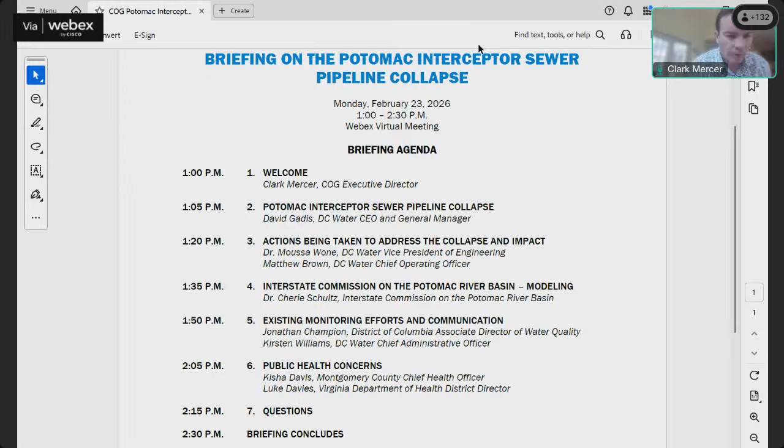The last few weeks we've heard quite a bit about the Potomac Interceptor and what is happening at the site of that break, but also its effects on the region writ large. The turnout on this call is a good example of the impact and connectivity of this region. I see several of our board members on the call: County Executive Brayboy, Mayor Gaskins, Supervisor Bailey. I know Chair Collins from Charles County is also scheduled to be on the call, so a wide range of folks from throughout the region.

The purpose of this call today, we're not going to answer probably every question that folks have, although please hold your questions, there is time at the end to answer them. This is going to get us caught up on what has happened to date, what efforts are afoot to address and fix the situation, and the impacts to this spill in the Potomac watershed itself. We've got our health directors on the call to talk later about some public health elements of this, and we're going to leave time at the end for questions.

I would start by handing things off to Mr. Gadis and DC Water. And just as a preface to this, this region has been through quite a bit in the last year or two, and I know Mr. Gadis and his team have been extremely hard at work over the last several weeks, staying on top of this issue and articulating a solution and a path forward.

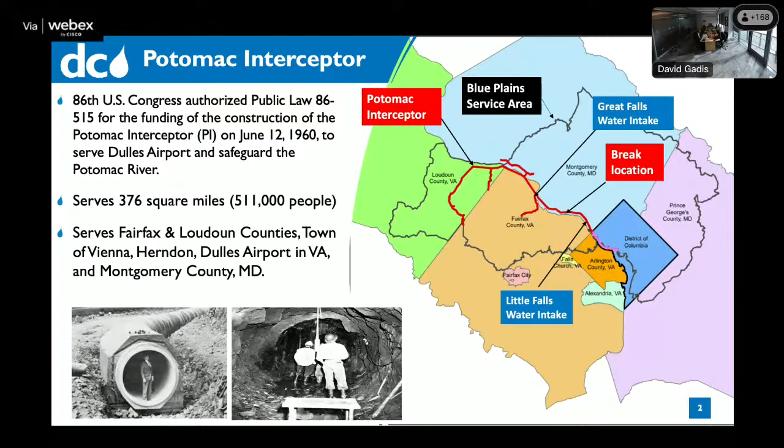The Potomac Interceptor runs as far out as Dulles Airport, conveys flow down 54 miles into Blue Plains, serves over 500,000 people, including Fairfax and Loudoun counties, Vienna, Herndon, Dulles Airport, and Montgomery County, Maryland.

This map shows the break location, and I have subsequent slides that show this with more specificity.

There are two water intakes for the Washington Aqueduct. One is north, or upstream, of the break location - that's Great Falls, and that's the intake being used when the break occurred. There is a smaller intake at Little Falls that is downstream of the break location.

The entire asset is about 54 miles long. It ranges in diameter from 30 to 96 inches. The site where the break occurred was a diameter of 72 inches.

It conveys on average 60 million gallons of sewage a day. Low flow is about 40. It can get up to 100 during wet weather events. We got a lot of calls yesterday and this morning about the wet weather we experienced yesterday and overnight. There were no additional overflows overnight.

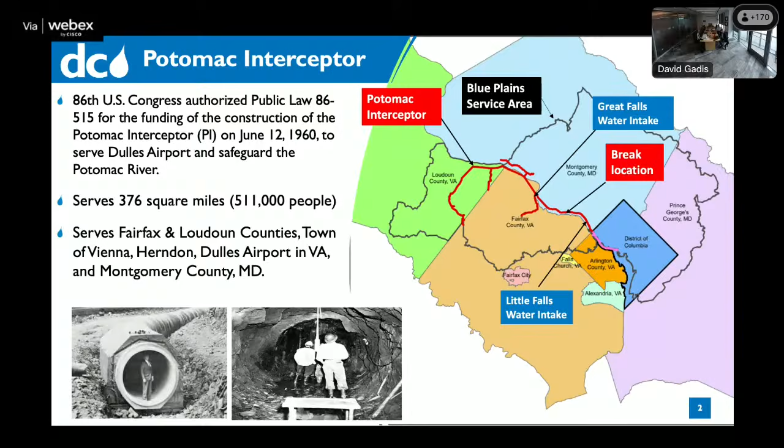As Mr. Gadis said, it appears that some of the fill used was actually debris from the blasting, so we believe that's where some of the large rocks came from that impeded our progress as we reached the break. When that happened, we knew we needed to block off 100% of the flow into the asset so that people could go down there, manually remove the debris, and pull up rocks to clear the blockage.

So that's where we are, in stage 3, repair and flow restoration. We began that at the beginning of February. We anticipate we will have this work done by mid-March. It encompasses reaching the blockage, removing the blockage, and reinforcing sections of pipe upstream and downstream of the break so that we can return flow. After flow is returned to the asset, that emergency repair will be done.

We have already begun working on environmental restoration efforts, started a couple of weeks ago. We knew there would be efforts to restore 3 main areas: the C&O Canal, where the flow is being diverted now, the drainage channel that carried flow from the break site to the Potomac River and runs under the C&O Canal, and the Potomac River shoreline to Swainson Island.

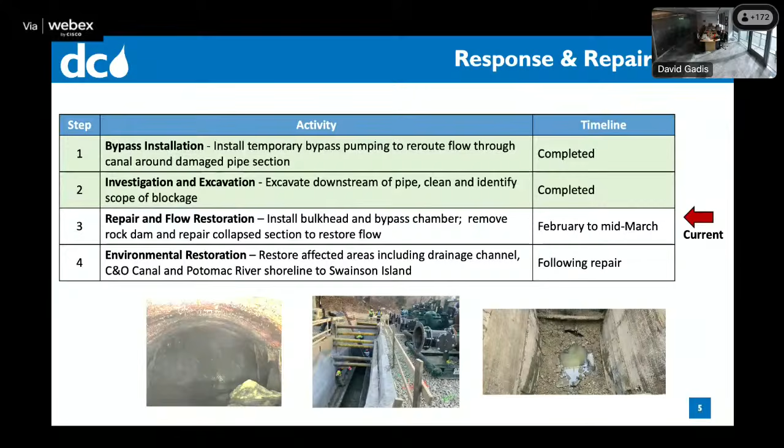Under the light of day, we began putting a plan in place, working with the Park Service. It was a big effort to bring in the pumps and get the bypass pumping established, and to remove the gates from the historic locks along the C&O Canal. There was a lot of coordination with the National Park Service, who have been really great to work with. They were out with us the night of the 24th when we were able to start turning on the pumps and walked the entire distance with us as the flow entered the C&O Canal.

We also had to do a bunch of brush clearage - there were plants in the C&O Canal that were removed by our contractors. On the night of the 24th, we had 40 MGD of pumping capacity, 6 pumps at 2 different manhole locations. We did experience some difficulties in the cold. One of the biggest issues was that pumps were getting clogged up with rags and grease, and as the pumps were taken out of service to clean them, because of the cold weather, they froze up. So we started building tents with tarps around the pumps and bringing in heaters. That meant that when the pumps clogged up with rags, we were able to take them out of service without them freezing up. We also brought in additional pumps, bringing the pumping capacity to 60 million gallons a day by January 27th.

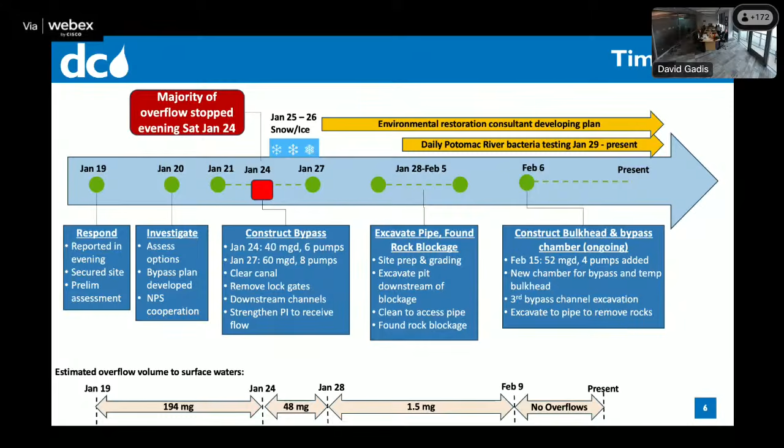One location is north at Old Anglers Inn, north of the spill site. The second, number 2, is at the spill site, and then locations in the district: Fletcher's Boathouse, Georgetown. We added the Anacostia River at the request of the riverkeeper because of the tidal nature of the Anacostia. There's also a site in Prince George's County at National Harbor.

We anticipate that those areas will remain elevated until we can do the environmental remediation work. It's important to note that E. coli levels vary pretty substantially in the Potomac River. We have testing data from 2016 as part of our post-construction monitoring of our Clean Rivers program. It seems to range from 10 to 5,000, just depending on the day, rainfall, and other events in the Potomac River.

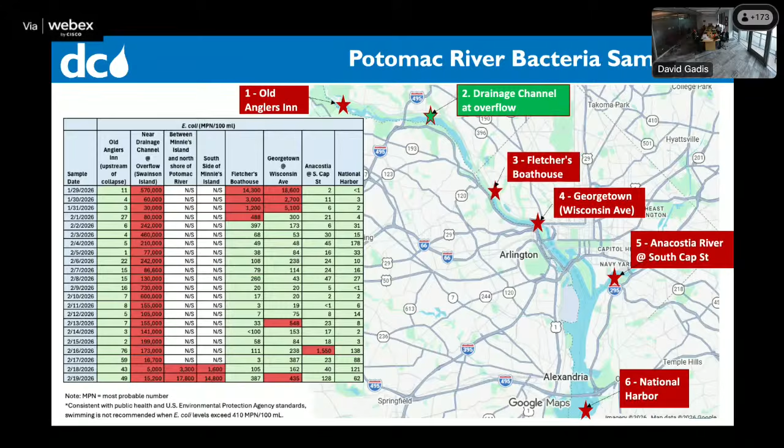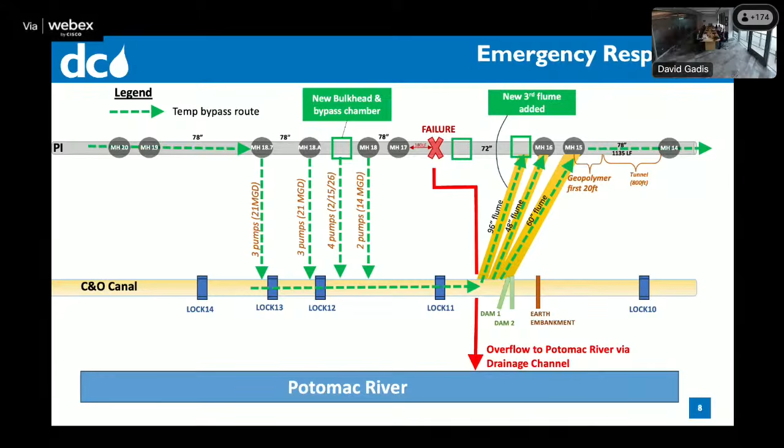This is what we flexed to when we constructed the new bulkhead and bypass chamber, adding the additional pumps to cut off flow to the Potomac Interceptor and get 100% of it into the C&O Canal. By adding that 96-inch additional flume, we were able to handle the additional capacity of flow into the C&O Canal. When we put that flume online, levels in the canal dropped almost a foot, so the canal is able to move all of that flow.

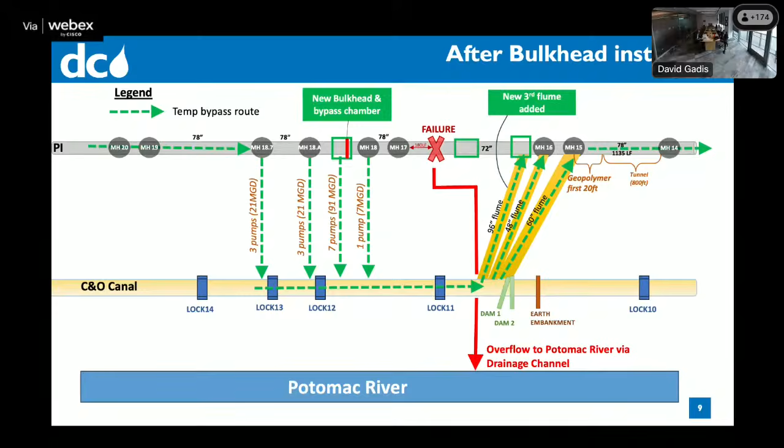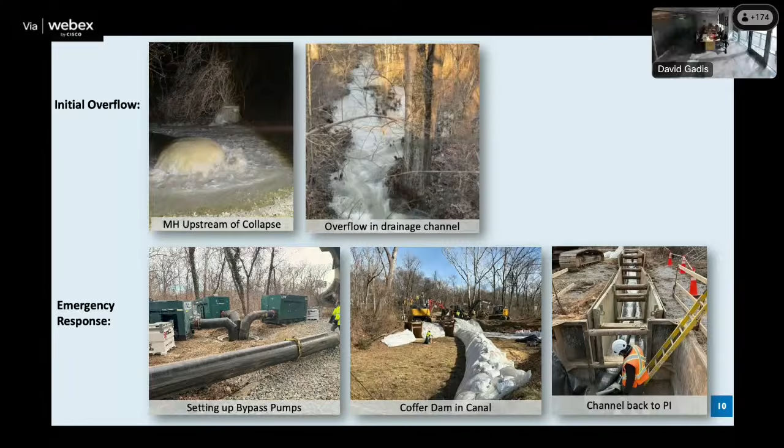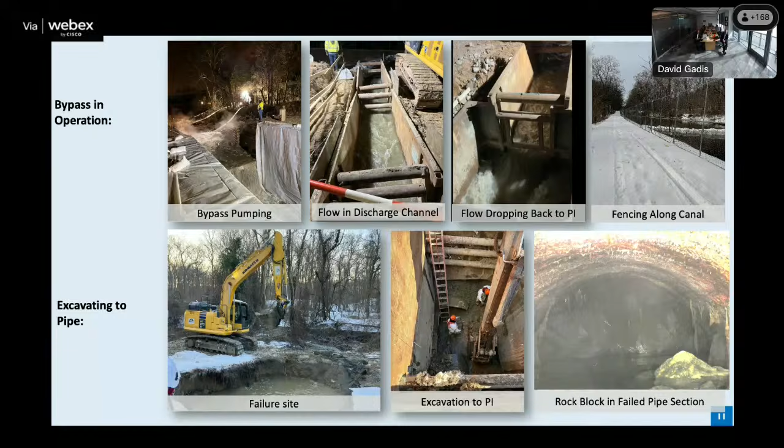We also put up signage — I think we have a picture of that in another slide. After we got the bypass into operation, we began excavating the failure site, and that's when we encountered the rock block, shown in the picture on the right.

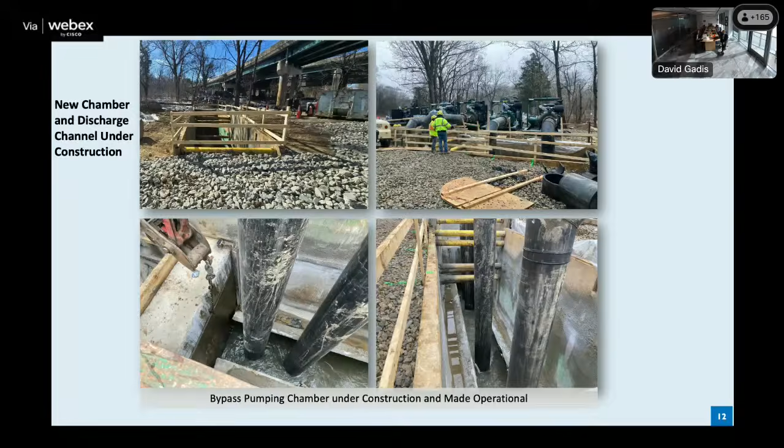Those releases, I'm sure you've seen them, are posted on our website and sent to elected officials. That's been a primary way of providing an update every day. We also include the water quality testing results when we have them in that update every day.

There's been a lot of coordination — NPS, Coast Guard, FEMA, Corps of Engineers has been on site recently, Maryland Department of Environment, District Department of Energy and Environment. A lot of folks have shown interest, and we've been able to provide tours and show the efforts the men and women have accomplished to get this done.

Matt, before you go ahead and jump to the next slide — yeah, no worries. Just a note for all the members on here, Mr. Mercer will work through Lisa Reagan, who's been helpful in coordinating the communications team.

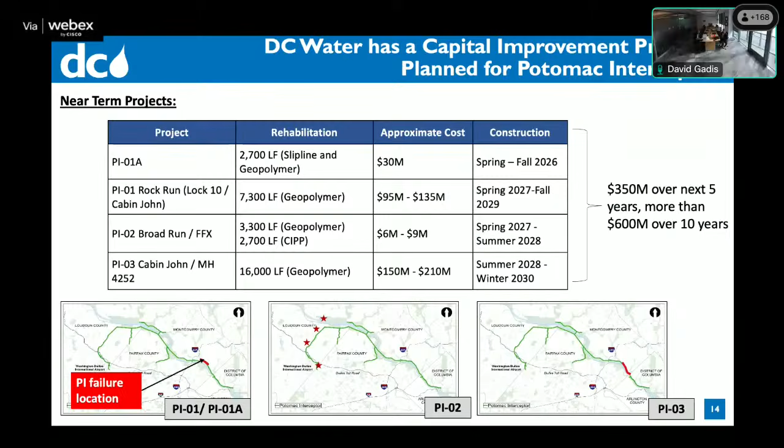Prior to this failure, there was 800 linear feet of slip lining done upstream of the failure location. That was a project completed in the December timeframe.

I mentioned earlier about the environmental restoration. We are currently sharing a draft of the plan with National Park Service and MDE. They're doing walkthroughs — we want to make sure we understand the requirements, and there have been at least three site visits with those two organizations to ensure we can restore those three areas to the conditions that existed prior to the break.

We've done that through an environmental consultant brought on board a couple weeks ago. We walked the site and made recommendations about the environmental restoration plan. Those three areas are the C&O Canal, currently being used as a bypass; the drainage channel, which carried the flow into the Potomac River from the break site; and the area where the wastewater entered the Potomac River between the shore and Swainson Island.

We want to do this as quickly as we can and are working with those organizations to understand requirements so we can get it done as quickly as possible. It's going to be done in phases — the canal will require additional remediation, likely bringing in soil, planting, and similar work. What's been identified so far is a couple of phases for each location, and we're working with MDE and NPS to get that work done as quickly as we can.

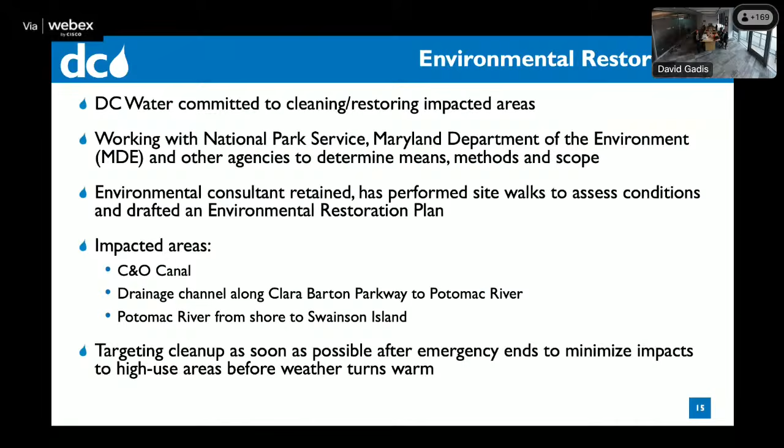And so that takes us to where we are. The very first thing is to repair and restore flow back to the Potomac Interceptor as quickly as we can. That is the way we will not have any more overflows. We've been very successful and haven't had an overflow that's impacted the surface water since the 8th. The way to provide 100% assurance that we won't have overflows is to get the flow back in the PI, so we're really focused on that mission right now.

We've already made some progress on the environmental restoration in that we have a draft plan and we've had conversations with NPS and MDE about it. As soon as we can, we want to be able to start that work. The site is heavily used by recreators. We'll continue our rehabilitation work on the greater Potomac Interceptor. It's an important asset, and we'll continue to invest in it.

That concludes the presentation I have.

Matt, am I back? I don't know if you can hear me. Yeah, sorry, let me see if I can go back. No worries, I apologize, I'm not sure what the technical glitches were, but I did just want to acknowledge Mr. Mercer and Lisa Reagan for their efforts to coordinate us on a communications front, and certainly Monica.

One of the two most important takeaways is that we have two public meetings, community briefings we're doing in partnership. The first is Wednesday at 7 p.m. at the DC Water headquarters. The second is Thursday, February 26th at Walt Whitman High School in Bethesda, Maryland. Both will have live streaming opportunities and engagement, and tabling efforts from our regional partners on an environmental perspective and public health perspective.

So we just wanted to make sure you all have that information and can share it effectively through your distribution list, because we want to ensure interested residents, advocacy groups, and our environmental partners have an opportunity to engage and hear this type of feedback with us. Thank you, and apologies for the technical glitch, not sure what happened earlier.

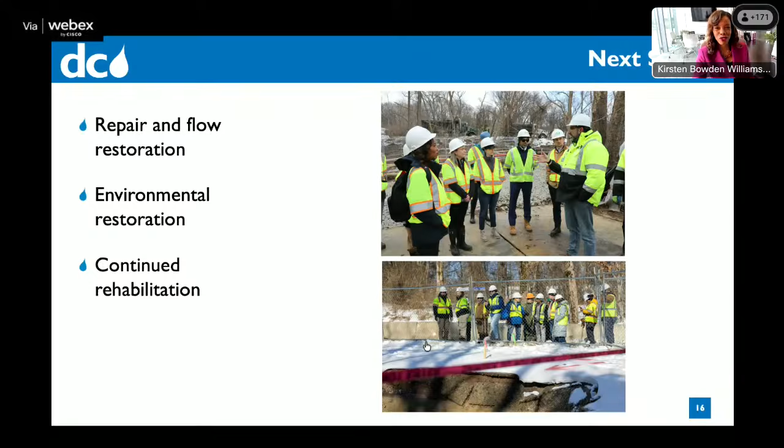Please use the chat, folks, as we have the next couple of presentations, for running questions, and we'll have DC Water back on in just a few moments. I know folks will have questions at the end, but if you think of them during the presentation, put them in the chat so we can get those answered. We'll hear next from Dr. Schultz with the Interstate Commission on the Potomac River Basin, ICPRB. They have done some great work on modeling the effects of this break and what that means downriver. So, Dr. Schultz, you're up.

Thanks very much. I'm Cherie Schultz with ICPRB's section for cooperative water supply operations on the Potomac, and we were asked to talk about some of the spill modeling we've done in relation to this event. Next slide, please.

We've done two preliminary modeling efforts, both related to public health concerns and pathogen levels in the vicinity of the break. The first was requested by Maryland Department of Environment and EPA Region 3; we modeled pathogen levels between the break and Chain Bridge. The second was done just recently at the request of the district, modeling travel speeds of pathogens in the vicinity of the district.

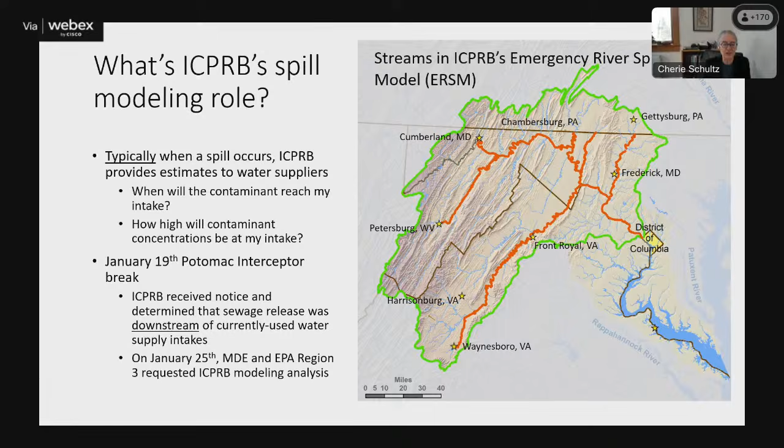On January 19th, we received notice of the sewage release late that evening and quickly ascertained it was downstream of any water supply intake being used at the time, so we didn't model it. It wasn't really threatening an intake. But on January 25th, MDE and Region 3 requested some modeling analysis from us.

So the first thing we did on the 25th was model pathogen levels in the vicinity of the break. We used the emergency river spill model to look at bacteria concentrations downstream of the break, in a very short stretch of the river. This model's extent goes just down to Chain Bridge, so we were looking at concentrations over a 5-day period from the 19th to the 24th, just down to Chain Bridge.

We modeled fecal coliform bacteria, which is an indicator of pathogen presence. There are many other species of bacteria that may be of concern, but if you understand fecal coliform concentrations, you can make estimates of other concentrations.

Our modeling, and all modeling, uses many estimates and simplifying assumptions. The model results are just estimates and should really be taken as an indication, a heads up, of when and where monitoring should occur.

We assumed that the sewage release began on January 19th at 4 p.m. and lasted 5 days, 120 hours, which is what we knew on the 25th. The release rate we were asked to model was 40 to 60 million gallons per day of raw sewage entering the river.

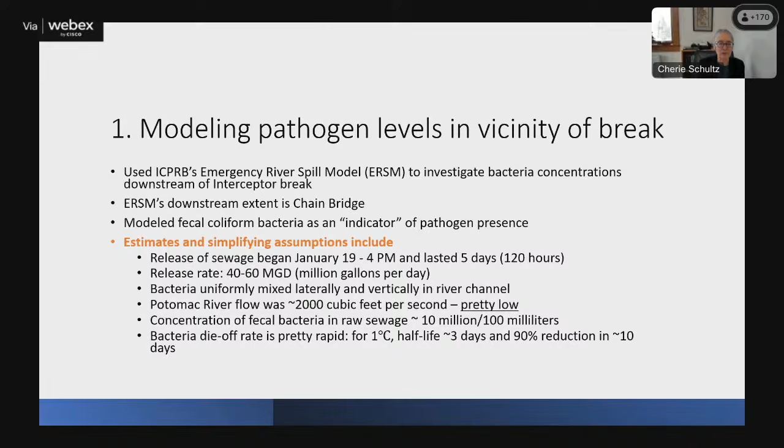So I won't show you the modeling results, but here are the key takeaways from this first modeling activity with our ERSM model. I want to stress again, the release was downstream of all water supply intakes except Washington Aqueduct's Little Falls intake, which is a backup, and we knew it wasn't being used at the time.

Our model was showing fecal coliform levels between 200,000 and 400,000 counts per 100 milliliters, and E. coli levels between 70,000 and 125,000 counts per 100 milliliters - more or less in the ballpark of what some of the monitoring is showing. Again, this was just in the area downstream of the breach down to Chain Bridge, assuming just a 5-day release that then shut off.

When the sewage did stop flowing into the river, according to the model, predicted bacteria concentrations fell quite quickly to near background levels due to die-off and also due to flushing and dilution by river flow. Our model predicted that at Little Falls, the Washington Aqueduct intake, bacteria levels after the release stopped would fall to near background in about a half day to 1 day. At Chain Bridge, the model estimates bacteria would fall to near background levels in about 1 day. So that was fairly optimistic.

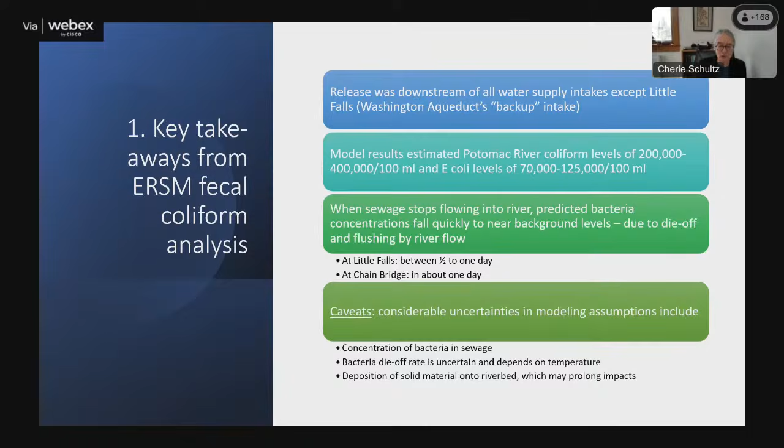The second modeling exercise was done more recently for the district. Again, they're interested in the public health aspects of this release.

They wanted us to model the travel speed of the bacteria in the vicinity of Washington, D.C. So we used another model that extends farther down, all the way down into the Potomac estuary. It's called ICWATER model, developed by EPA and others, and it's currently maintained by a contractor for the U.S. Army.

This model allowed us to estimate net mean velocities of water in the Potomac estuary, telling us how fast bacteria would be carried down the estuary to the edge of the DC border. Our objective here, again preliminary, was just to estimate mean travel speeds of a contaminant release, using estimates and simplifying assumptions. The release location we assumed was near I-495 and the Clara Barton Parkway.

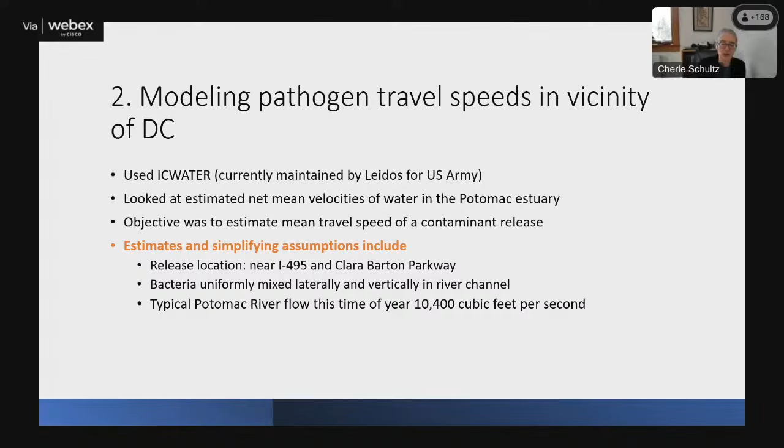We assumed bacteria is uniformly mixed laterally and vertically in the river. We used a different flow because by this time there had been some precipitation events, so we chose a typical Potomac River flow for this time of year of about 10,000 cubic feet per second.

Takeaway from the second modeling exercise: according to our modeling and assumptions, in the event of a short-term release—we didn't specify what was released or how much—pathogen levels would flow past the DC southern border in less than one day. Pretty rapid.

Caveats again: our model doesn't consider processes which could prolong impacts, including transport and oscillation by tidal currents, and deposition of solid material onto the riverbed.

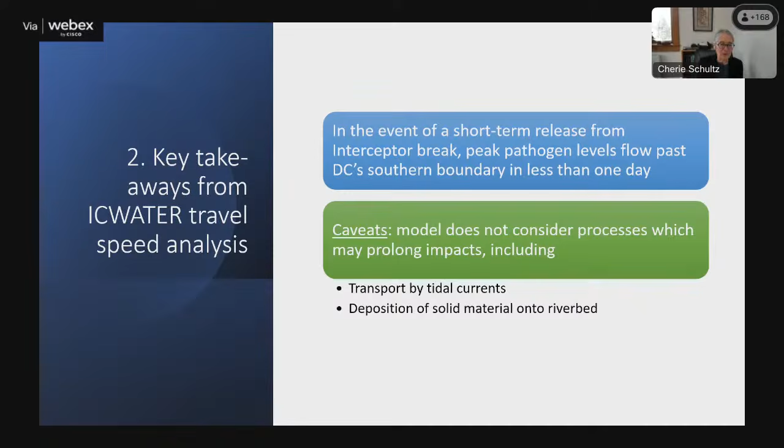Finally, I want to say a little bit about the Potomac estuary downstream of DC, all the way down to Colonial Beach and Smith's Point—places you may visit sometime, but probably aren't thinking about right now. Here we don't have any modeling capabilities to investigate or explore what might happen. It's possible that the Chesapeake Bay Program's estuarine model would be useful here.

The potential impacts I've heard about from our aquatic ecologists and water quality specialists at ICPRB may play out in future months, maybe this summer, maybe for a number of years. First, nutrients—nitrogen and phosphorus from the sewage—may increase growth of algae downstream and may increase the likelihood this summer of harmful algal blooms.

Secondly, the deposition of sewage sludge, solid sewage material on the riverbed, may increase biological oxygen demand this summer in the river sediments, and the likelihood of fish kills. These are things that will definitely need investigation by environmental scientists.

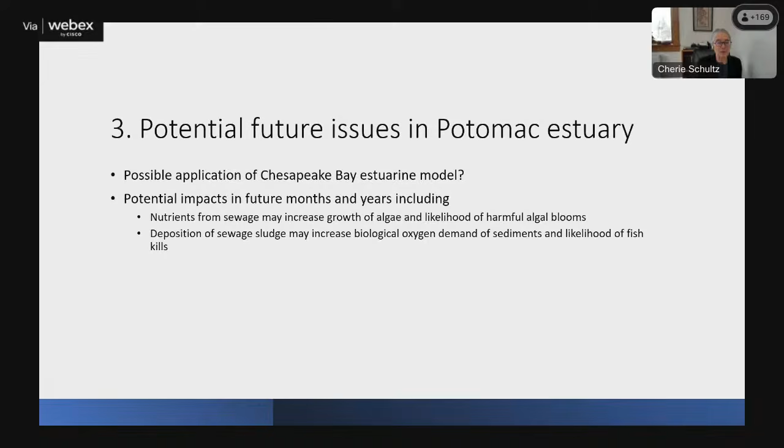Final takeaways. In terms of water supply, which is the purview of my group, we want timely completion of repairs, and we hear that's definitely happening—we're very grateful about that. These are important because Washington Aqueduct's Little Falls intake is just a backup, but an important one, especially in case we're hit by severe drought this summer, because then they need to switch to the Little Falls intake if flows fall below certain levels.

Secondly, certain sections of the Potomac Interceptor are above essential water supply intakes and should be prioritized, we feel, for future repairs. We can see in the material Matt Brown showed us that repairs are definitely going to take place upstream. This was requested in a letter by our executive director, Mike Nardolilli, to EPA Region 3 on the 29th of January.

As far as public health concerns, when sewage stops entering the river, we expect bacteria concentrations to fall to near background levels quickly due to die-off of bacteria and flushing by river flow. Modeling and monitoring have complementary roles.

So really now we think monitoring is most important, and it looks like DC Water and the district are doing that monitoring. Finally, risk from residual solid materials remaining on the riverbed is uncertain—this could make some hazardous effects linger, and there's uncertainty there.

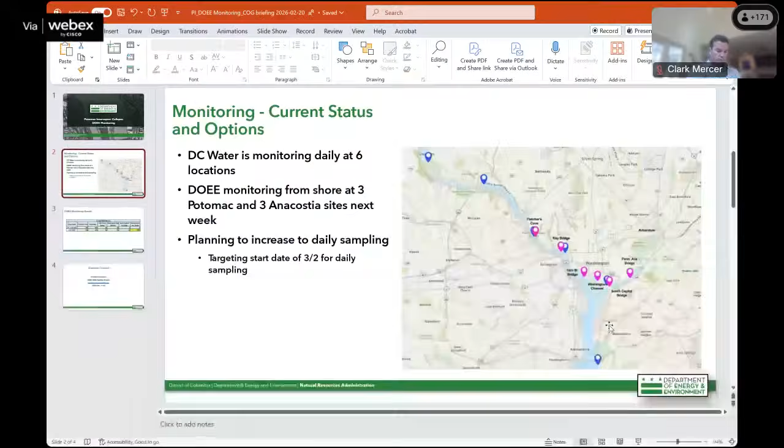Thank you very much. Good afternoon, everybody, can you hear me okay? Okay, great. If you'll permit me, I'll leave my video off to minimize bandwidth issues, but I do have a couple of slides to share. I wanted to provide a quick overview and summary of where things stand in terms of the district's monitoring posture at the moment. Is that coming through okay? Yes, we can. Okay, great, thank you.

This is picking up on some of the information DC Water shared in their presentation. They have been monitoring daily since the end of January at 6 sites throughout the Potomac River. DOEE is also conducting our own monitoring effort, covering, in some cases, stations that are co-located or very near DC Water's stations, and in other cases filling in spatial gaps where DC Water isn't sampling. We are currently conducting weekly sampling from 3 sites in the Potomac, 1 site in Washington Channel, and 2 sites on the Anacostia.

For context, DOEE's typical monitoring posture at this time of year would be monthly sampling, which we step up to weekly bacteria sampling between May and September. The first sampling event post-collapse was collected on February 9th and 10th, and our team was out in the field last week as well—I believe we captured a sample on February 17th. We're currently working on a plan to increase sampling frequency to daily, to match the frequency DC Water is sampling at. That will require a fair amount of resources beyond what our water quality program typically operates with, so we're in the midst of getting that organized and planned now. Our target date to start daily sampling is March 2nd, or at least sometime during the week of March 2nd.

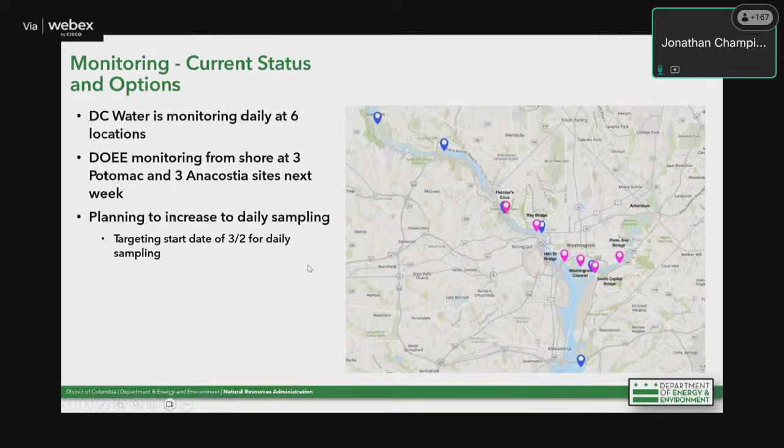We did have one elevated result further upstream in the Anacostia by Pennsylvania Avenue Bridge—I think Mr. Brown alluded to this in his presentation as well. We're confident that result is more associated with stormwater runoff due to a rain event in the day and a half leading up to the sampling. It's also consistent with other testing done further upstream in the Anacostia and some tributaries by Anacostia Riverkeeper. So we don't believe there's any indication that elevated concentration has anything to do with the discharge from the interceptor collapse.

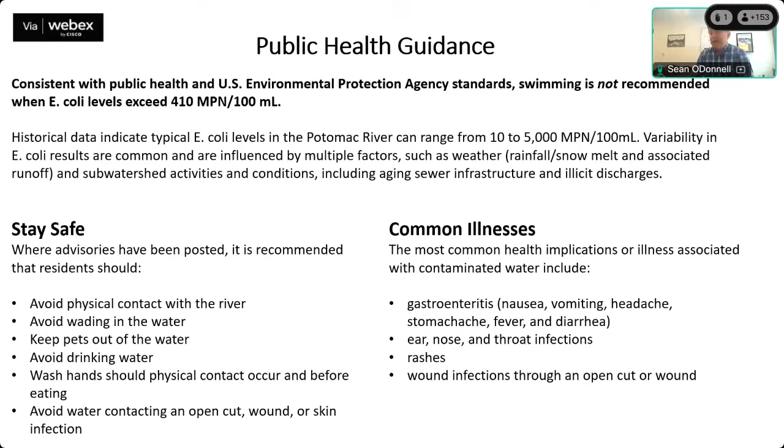I went through a number of what the advisories include, not just for our residents and visitors, but also if you have pets, try to please keep the pets away from the water. They don't read the signs that are posted there, and if they go in the water, they could become sick. If you do have accidental contact with the water, please use routine hygiene standards to clean out any contamination. And then some of the common illnesses you'd see from being exposed to this bacteria: gastroenteritis, ear, nose, or throat infections, rashes, or even wound infections if you had an open cut.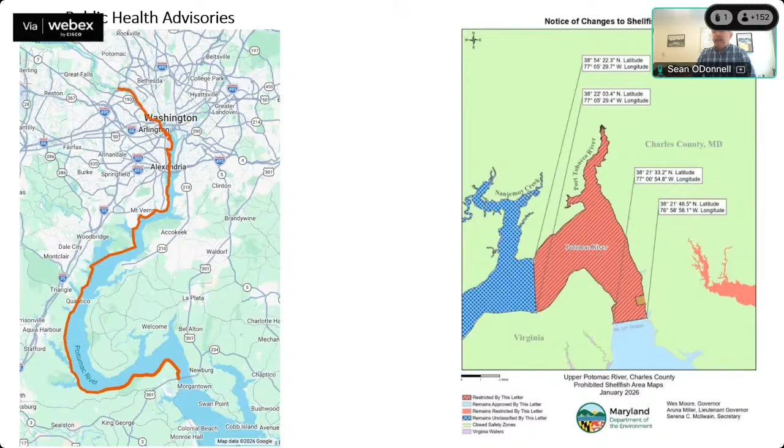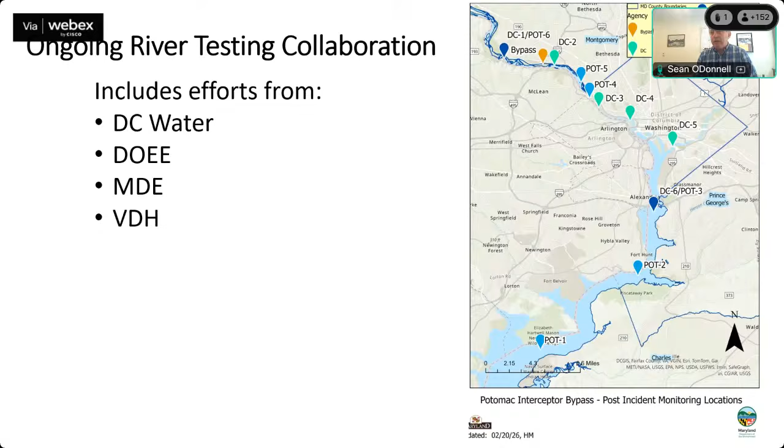I know we've seen what DOEE, what DC Water, where they're collecting. Maryland Department of the Environment is updating a map as well, showing some of the locations where they have been collecting specimens. Those results will start to get published to their website as well. And we've had discussions with them about testing in other specific locations as time goes on, just to verify results from our partners, and they said they're happy to support us in that.

And then we can actually go to the open questions, but in general, we're again recommending to avoid unnecessary contact with the Potomac River. In particular, as we've said about other diseases, vulnerable populations, including immunocompromised individuals or those with very young children, those are the folks who are at increased risk for serious illness. We want pet owners to be aware and keep their pets on a leash and away from the contaminated water.

When we say boaters, it kind of depends. We've already had questions from our residents who are getting ready for their spring crew practices. There are people who kayak and people who do other boating on the water. Again, there's a risk in any boat for people to get exposed, to go overboard or be flipped. At the level of contamination we have along Montgomery County, we're preaching caution to not really come in contact with the water at all right now. But as you can see, as you go further down river, that risk starts to dissipate quite a bit.

We're also recommending that people do not fish or consume anything they catch out of the water. Again, as you go further down river, those precautions change a little bit. Most fish don't harbor as much bacteria as, say, some of the shellfish might. And then for those who are walking or cycling through the C&O Canal towpath, there shouldn't be a danger to that. It's probably not going to be very pleasant as you smell the sewage that's there, but we do appreciate that fencing has been put up around the containment area.

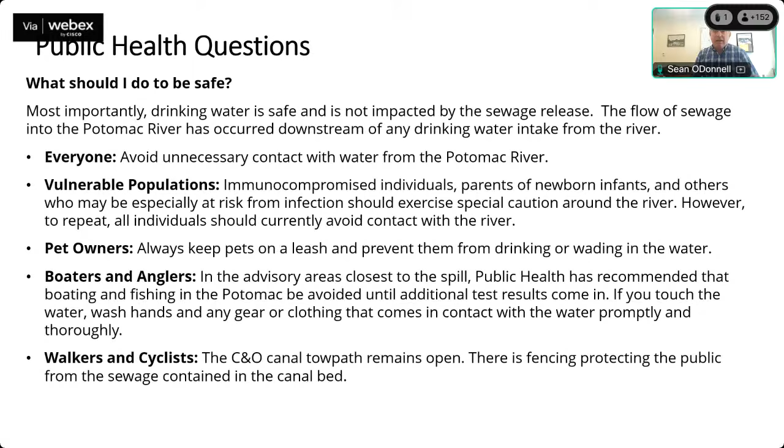And so again, those are just the key things we want to address. I appreciate our partners. I've borrowed many of the language here from our partners at DOEE or some of our other health departments. Again, we're trying to make sure that we're being consistent in the messages we've given out, even though different portions of the river have been affected in different ways. Happy to turn it back over to my health official colleagues if they have any additional things they'd like to add.

Sean, thank you. And is Luke Davies on from Virginia Department of Health? Is he also going to present in this? Yes, I am. I just wanted to say thank you to Dr. Davis and Sean for that presentation.

The Virginia Department of Health has been primarily working in a support capacity to Maryland and DC for this. We have been working to prioritize communication and advisories out to the public, as was shared by Sean. I'm just going to share some monitoring that VDH has been doing.

Really quickly here, essentially we've been monitoring shellfish primarily down below the 301, the Colonial area where Virginia shellfish start. On February 17th, we sampled about 36 different water samples, and all of them were below the safe level. So at this point, we do not have any shellfish on the Virginia side that have been impacted on the lower Potomac.

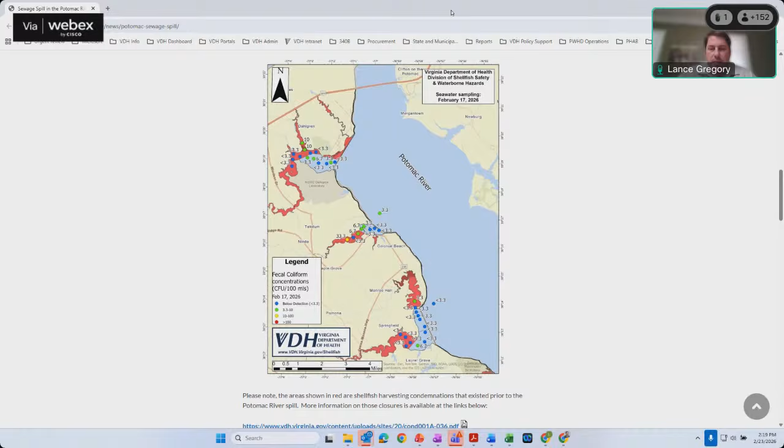And I do have Lance Gregory on from our Office of Environmental Health, who's been essential in partnering with Virginia's Department of Environmental Quality as well. Lance, do you have anything you'd like to add? Appreciate that, Dr. Davies. I think y'all have covered this very well.

Really, at this point, a lot of the public concerns we're hearing are just about communication. The public wants us to over-communicate on any updates on the incident, on the repairs, water sampling results. I see Director Rolban posted a link in the chat to the water results that DEQ has collected, in addition to the routine shellfish sampling we've collected.

We're starting to get questions about when the recreational advisory will be lifted for Virginia. At this point, we're just trying to emphasize that the advisory will remain in effect until sustainable repairs are complete. But we are continuing to review information as water sample data comes in, and we'll update as appropriate. I appreciate everybody's communication and support from Washington, D.C. and from Maryland.

Okay, thank you. We've got about 10 more minutes left, and I know our chair from COG is on, Mr. Reuben Collins from Charles County, who had a question earlier. Chair Collins, do you still have a question? Yeah, I'm still here. Good afternoon, everyone. I'm again Reuben Collins, chair of COG.